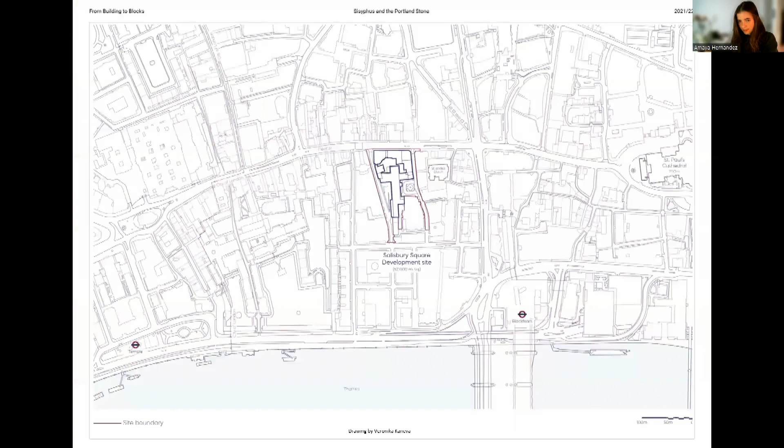Hello, my name is Amaya, and my project is called Sisyphus and the Portland Stone. I'm sorry that I could not be in the room with you today presenting, but I hope you enjoy the presentation. So the presentation is split up into 4 parts, and we begin with a prelude. The demolition site I chose to focus on for my thesis is the Salisbury Square demolition. Situated in Fleet Street, the demolition comprised 9 buildings total, and it will make way for the City of London's new Justice Quarters designed by Eric Parry Architects. As a unit exercise, we were asked to make a material audit with all materials that we believe to have reuse potential on site.

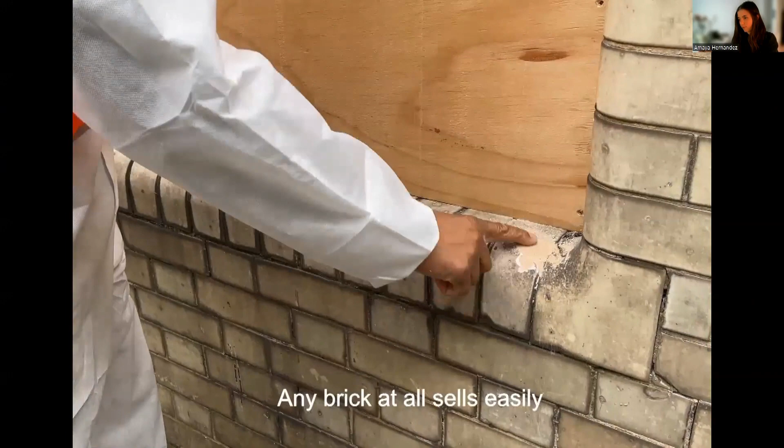Eager to know if these materials had any value in the reclamation market, I decided to give some reclamation dealers a call to find out. Do you guys still take London stock bricks? Yeah, are they the red ones? Or they're the yellow ones. Yellow? Yeah, we do. That's the only kind of thing we're looking to buy in at the moment, kind of brick. Certainly bricks are worth fortunes at the moment. Any brick at all sells, and all stone, slate, and stuff like that.

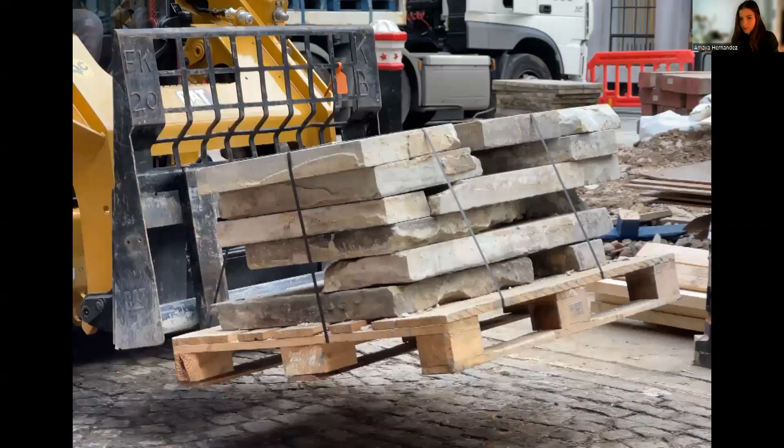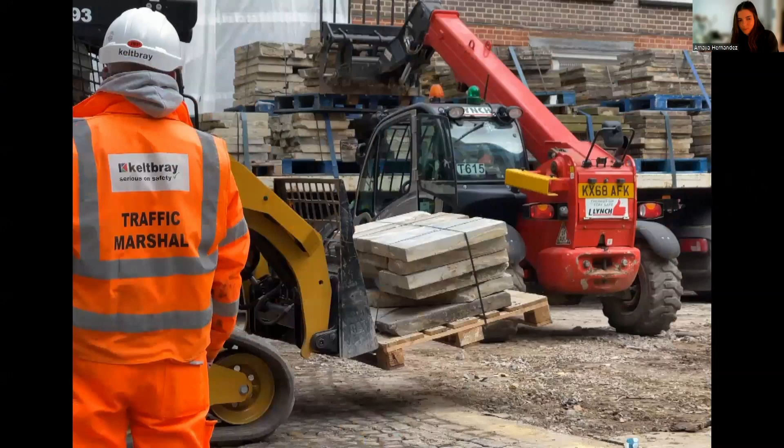So after contacting 8 dealers, I took the opportunity to send them the material audit that was previously made, and I helped the interested resellers schedule site visits with the demolition contractors directly. As a result, 500 square meters of Yorkstone paving were reclaimed from site, as well as some doors and cast iron railings.

It was a bit surprising to me that it took an overly enthusiastic architecture student to connect the reseller with the demolition contractors to ensure the reclamation of the Yorkstone paving. Surely this had to be somebody else's responsibility on site, no? But after looking at an endless list of consultants for demolition sites, I realized that there is no one actor who is responsible in overseeing the reclamation of materials.

Apparently not even the on-site sustainability manager, as one of the site managers told me I had done more in a week to reclaim materials than their sustainability manager had done in a month. Perhaps this is due to the incredibly vague job description, which mentions something about the implementation of sustainable strategies, which can really mean a lot of different things.

What I propose is an incredibly specific job description, a new consultant in the building industry that I am calling the material broker. A material broker facilitates negotiations between material resellers, demolition contractors, architects, and their clients to promote the reclamation of our existing building stock. Ensuring material salvage is the sole responsibility of this consultant, and of course, everything that comes with it.

The reason why this is such a crucial role is because many material reuse ambitions start out quite strong, but are left to the stamina of the other actors in the ecosystem. Inertia takes hold, the actors become increasingly busy, and the reuse ambitions begin to crumble until there are none left. This is why the material broker role as a mediator would be beneficial in making an active change in the building industry. When it comes to reuse, the actors in the ecosystem will revolve around the material broker, easing logistics, storage, and reclamation procedures, as well as salvaged material procurement for anyone involved.

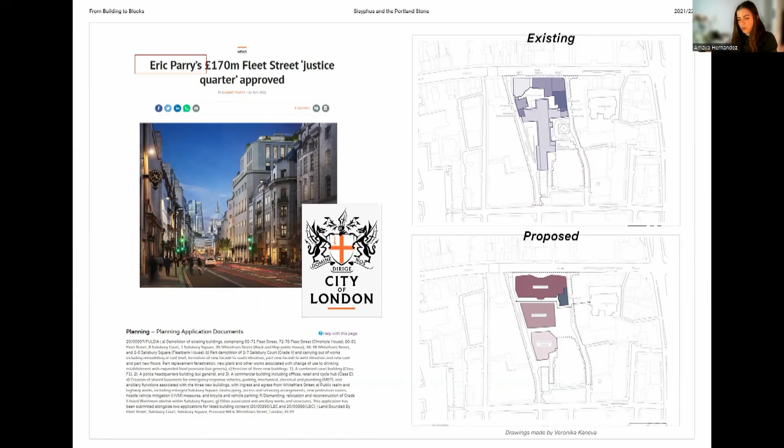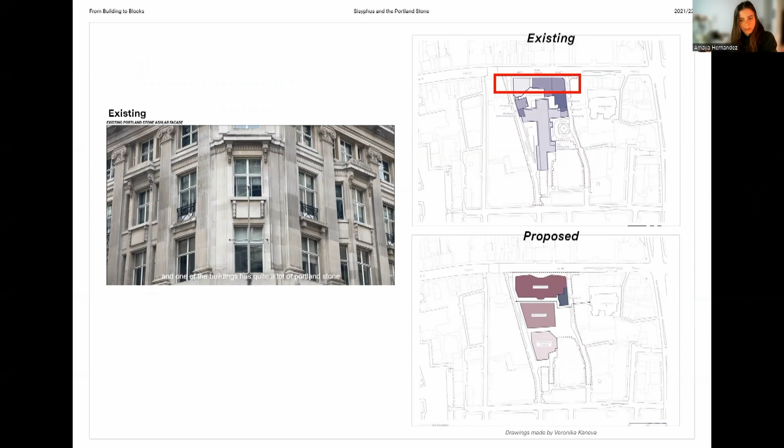When I was thinking of who could potentially reclaim the stones, I thought the most obvious contact was Eric Parry Architects themselves, as they, along with the City of London, have decided to demolish a Portland stone building and replace it with a Portland stone building. My first ambition was to convince them to reintegrate the existing Portland stone into their new scheme.

But I couldn't just send them photos like I had done with the previous resellers, because I knew that all that they would see was a whole lot of ornament, which clearly clashes with the Eric Parry cool aesthetic. Or does it? What better way to convince architects than through design? My theory was that if I designed the stone reintegration well enough into their new scheme and presented it to them, they would be so impressed and want to salvage the stones themselves.

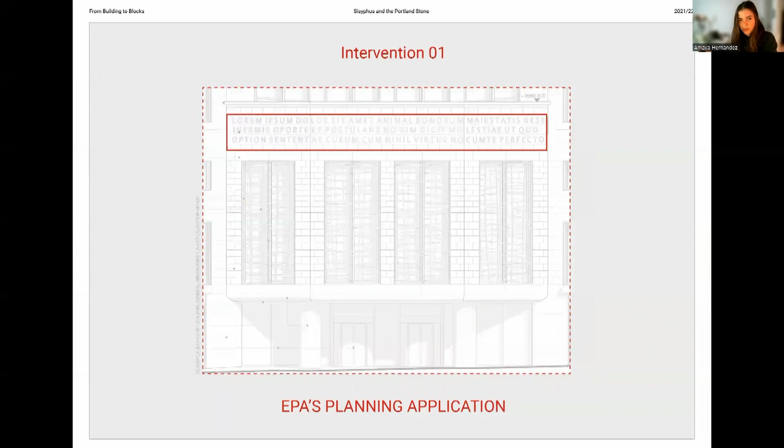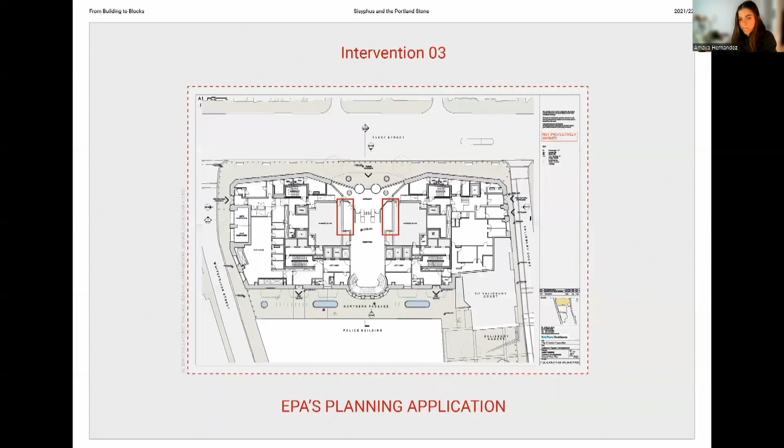After categorizing the stones from 80 and 81 Fleet Street, I chose 3 moments in the Eric Parry existing scheme that I saw fit for reclaimed stone. I added reclaimed ashlar to the inscription band. Art Deco pilasters to the bay windows in the back facade, which just so happened to be the same proportions of what they were going to propose anyway. And the wall for the main entrance made from reconfigured pilasters, assuming that they are devoid of entasis.

I then packaged the drawings and sent them to the architects as an actual proposal for them to consider. But after meeting with them, they informed me that the project was too far along to make any changes. I then realized that design should be an integral part of the material broker's toolkit. So I repeated the exercise for 3 further projects to try to convince architects to salvage the Fleet Street stones, every time attempting to infiltrate not only their style of architecture, but their planning application documents as well, so as to help them envision the stones in their own project with ease.

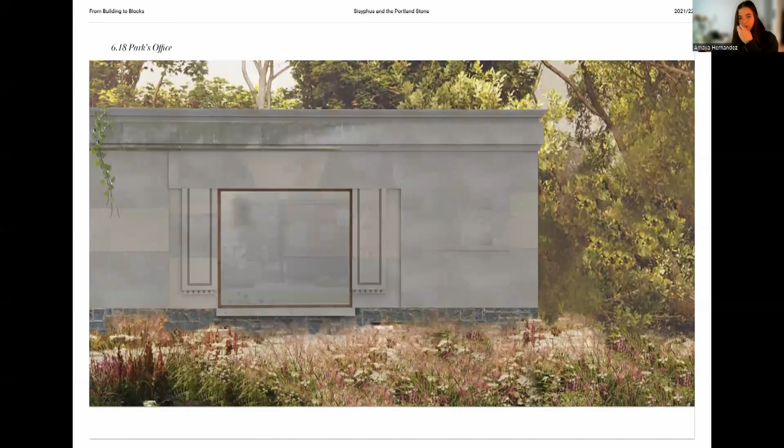Now, I sadly don't have time to talk about all of the designs, but my hope is that through reuse, we can also bring back a dwindling craft of building with stone ashlar, as well as re-exploring the possibilities of working with Cyclopean lime cement construction. No cladding here. As a material broker, I also wish to help promote and bring attention and clients to the existing resellers in the country by also providing them with design assistance and contacts.

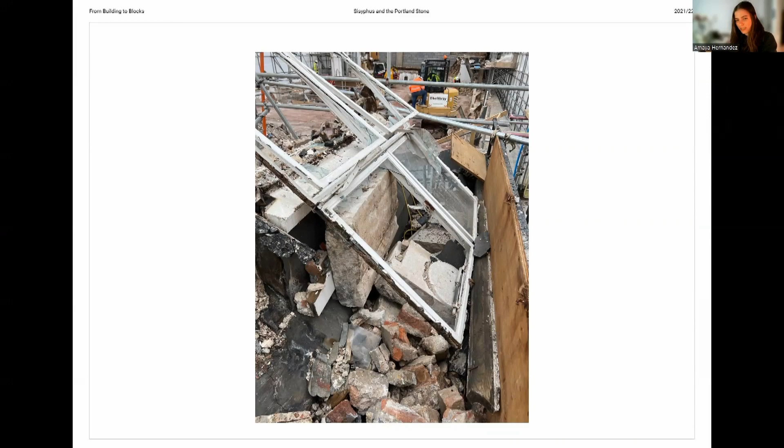So where do we go from here? In terms of the reclamation of the stone, as of now, meaning when I had first presented this project, this had been the only stone reclaimed by me. And as nice as it looked on the plinth from the honors presentation, my ambition is still to offer it to Studio Weave and reintegrate it back into the city.

In the last version of this presentation, it involved me saying that in case Studio Weave didn't manage to reclaim stones from site, there was still hope that the eccentric artist from Portland would reclaim the entrance to 80-81 Fleet Street and bring it back to Portland, as they showed a lot of interest in my interviews with them. And this is exactly what ended up happening. In a short email from Robert Greer, a contact at Pay Stoneworks, he informed me that the Portland Stone and Quarry Trust will officially reclaim the entrance stones to 80 and 81 Fleet Street.

And this is what their drawings actually look like. Unfortunately, I don't have any images or videos yet of the dismantling as it took place at the beginning of this month. But I can keep you guys posted, whoever is interested in seeing that.

And in terms of where the material broker is going, I have secured a job with the reclamation dealer Retrouvius, and have been asked by them to further develop the role of the material broker for the benefit of their company. And I've also been on the lookout for architecture firms I can infiltrate with a genuine interest in applying this research. And at least that is still the plan for when my holiday ends. And I'd like to leave you with this. Where demand does not yet exist, it can be sparked. And where supply is lacking, it can be encouraged.

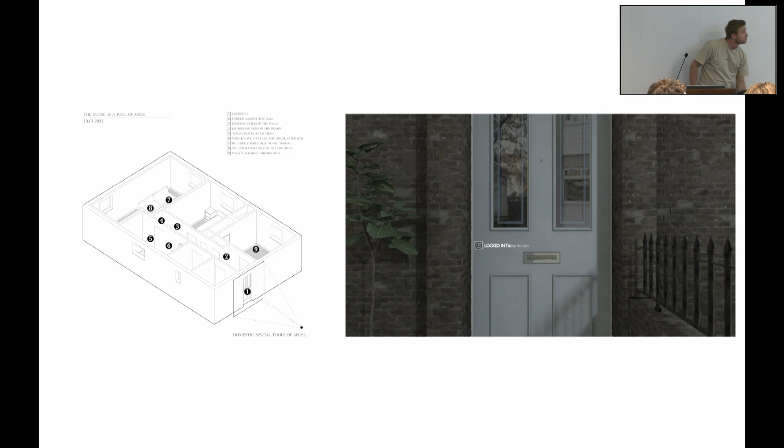There were times when my partner would lock me in the house and take the keys with him. I couldn't get to work and consequently lost my job. My partner would often force me up against the walls. I'm not able to be specific about where because it happened so often. He would punch holes through the walls and the doors and tell me to repair them because they were my fault. The doors became a weapon in the home. He would use them to jam my arms so tightly it felt like they were broken.

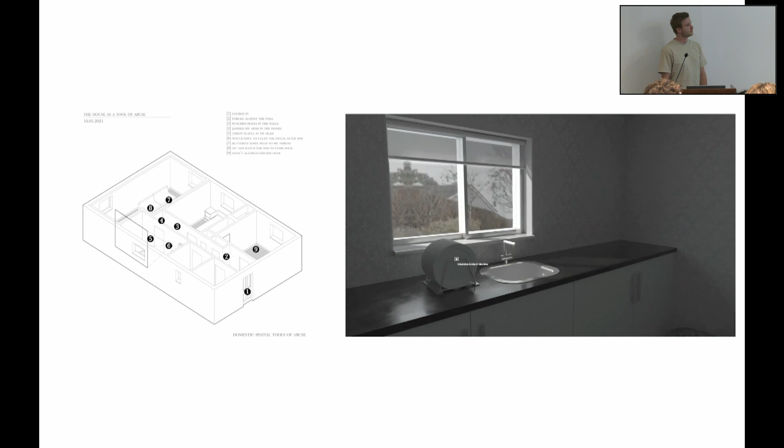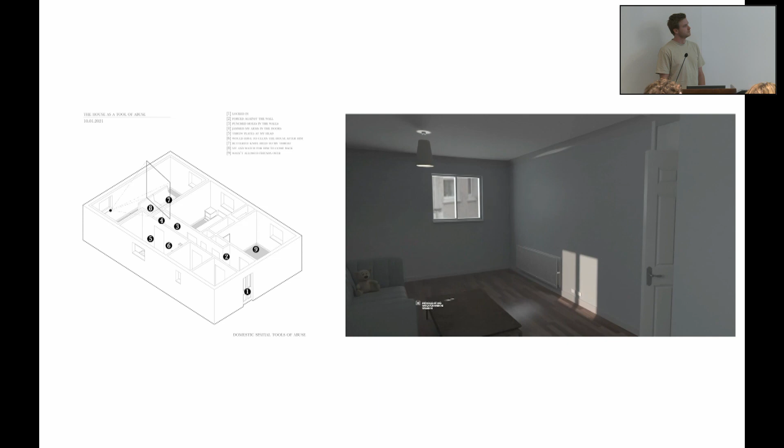He would throw plates at my head along with other objects, making a mess, and then would expect me to tidy it up. He would never help with the house. When he got angry, he would take out one of his knives to play with it, knowing this would scare me. One time he held a butterfly knife to my neck. I would sit on the edge of the sofa so that I could see when he returned. I wouldn't move when he hurt me. I didn't want him to feel like he had won.

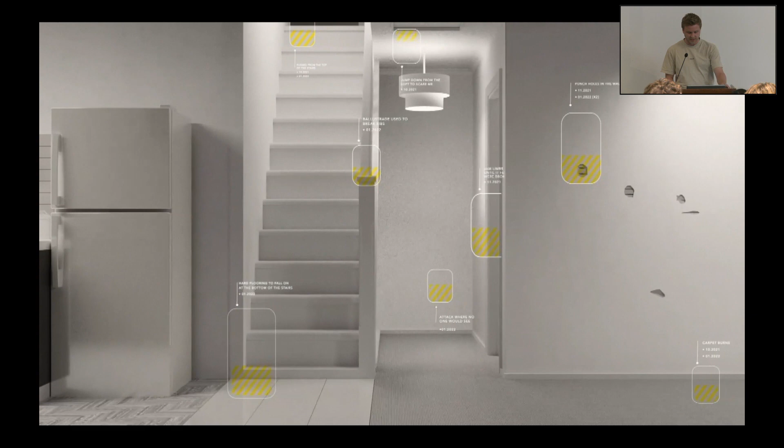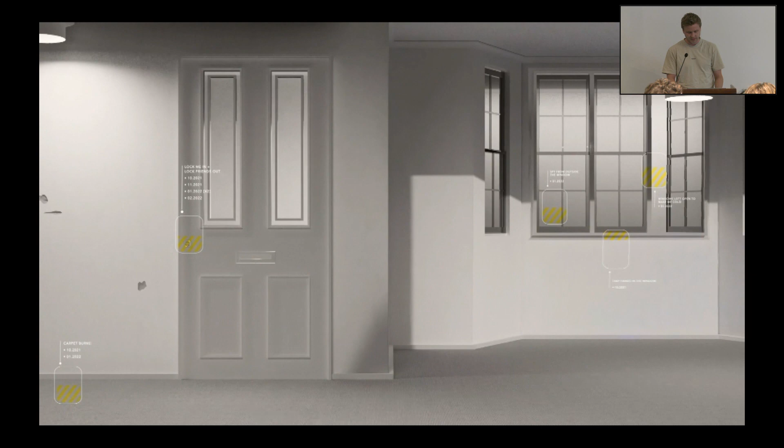Interviews with survivors speak of a series of architectural fragments used in abuse. Made evident through 3D reconstructions, these conversations have been translated into a spatial reading in order to clearly correlate the common trends of how the home has been used as a weapon. Although not the cause of abuse, the inseparable link between the home and abuse trauma has become a pertinent subject for the architect. The balustrade used to break ribs, heat sources used to burn hands, and kitchen counters used to cut open the back of survivors are just a few accounts told in conversation.

Additionally, interviews highlighted the importance that neighbourhood has on escape. Evident through one interviewee being continually beaten, she climbed out of her apartment onto the scaffolding to a neighbour's flat. She returned home where the abuser had been hiding in the loft. She fled again to the neighbour, who contacted the police and made an arrest.

Historically, refuge shelters provide short-term support. However, a shortage in permanent housing has meant the overcrowded shelter is refusing entry. In 2021, the UK government responded with the Domestic Abuse Act, giving priority to the survivor into social housing. Nevertheless, with no spatial criteria, the Act excludes the architect from the conversation through its terminology and definitions. Consequently, social housing as a long-term solution for many is ill-favoured or even worse than staying with the abuser.

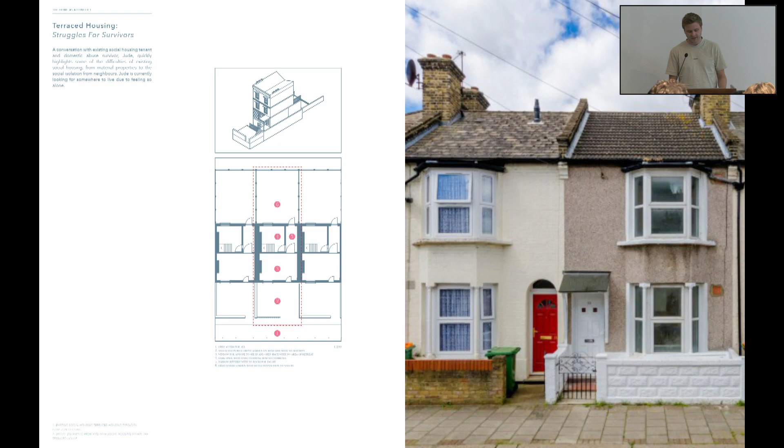Social housing typologies reveal the inappropriate spatial conditions for post-abuse, with the terrace triggering through public windows, the low-rise by sterile stairways and hard surfaces, and the high-rise through thick concrete walls and disjointed public views. Social housing as a response is currently delaying recovery.

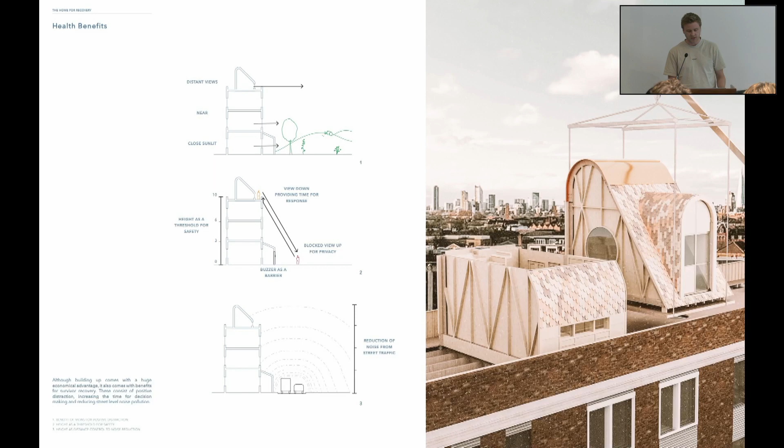In line with the Domestic Abuse Act, this project proposes a retrofit to existing housing according to a scale of funding. The materials and building methods reduce costs and construction time, allowing for the proposal to become an economically viable option. The proposal is designed to allow local authorities to work up to 4 different capacities. From fabrication through to fragments of urban recovery, the proposal creates social overlaps within existing neighbourhoods.

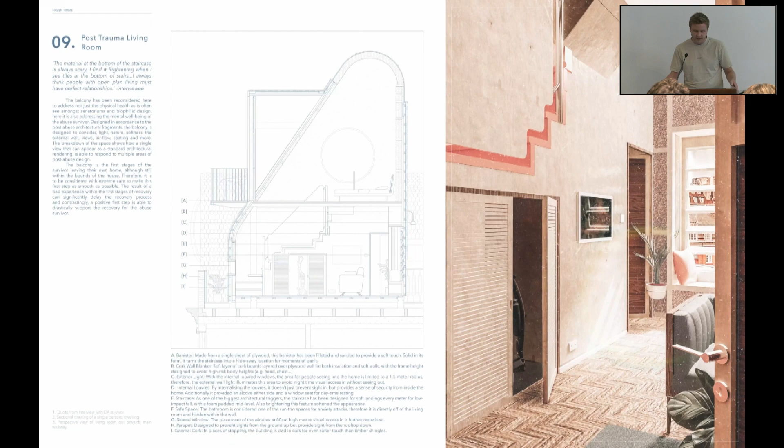The domestic space supports gradual recovery in the existing building through retrofits such as the balcony as the first moments of leaving the home. The design of non-typical windows and split-level staircases support a feeling of safety for those with PTSD. And further, the shared kitchen learns from existing shelters, enabling conversation with the adjoining neighbour having experienced similar events of abuse.

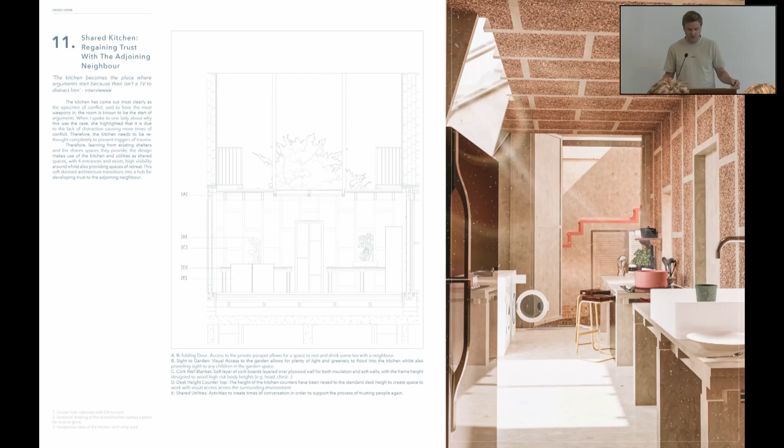The project is set out to support the recovery of those affected by abuse. However, in turn, the design re-engages with the existing community of social housing. Using height as a threshold for safety, on-site shared facilities such as allotments, swimming centres and the creche provide alternative routines within the existing estate to support the process of recovery through engagement, retrofitting the existing building and rooftop to better enable social crossovers.

Each estate works with already established stakeholders alongside local authorities, as I've already contacted, and the project responds at both small and large scales. Prior to construction, the design process offers a one-to-one built fragment as a tool for further conversation. The one-to-one re-engages with the survivor to discuss a life post-abuse. The interviews are not researching the survivor, but researching with the survivor, using their voice as an integral part to the design process.

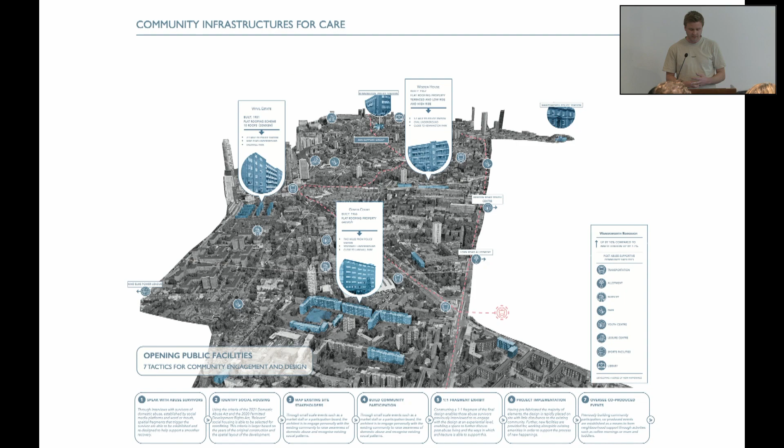Responding to a national problem by building on 3 main typologies in keeping with the permitted development rights, making use of community infrastructures, mapping relevant housing according to supportive networks.

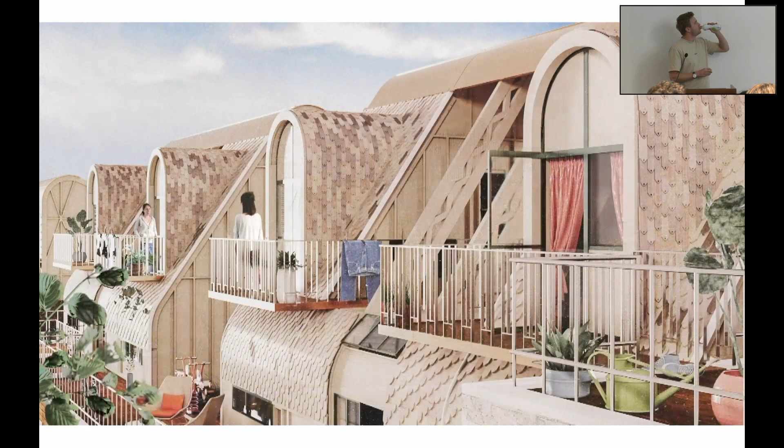I like to come out here in the mornings, see what's going on outside. Who's already up and out, and then head back in and start the day. There's a real parallel between light and progress. I feel like I'm finally starting to get back to a sense of normality, at least a new kind of normal.

I feel best when my mind is busy and doing something. When I'm alone at home, things always seem much harder. So I come out here, mainly to occupy my mind, to help forget, and to also start something new, spending time with my neighbours.

We go to the creche twice a week. It's an hour or two where she's happy playing with her friends, and I can just unwind with a cup of tea along with any other parents that want to stay.

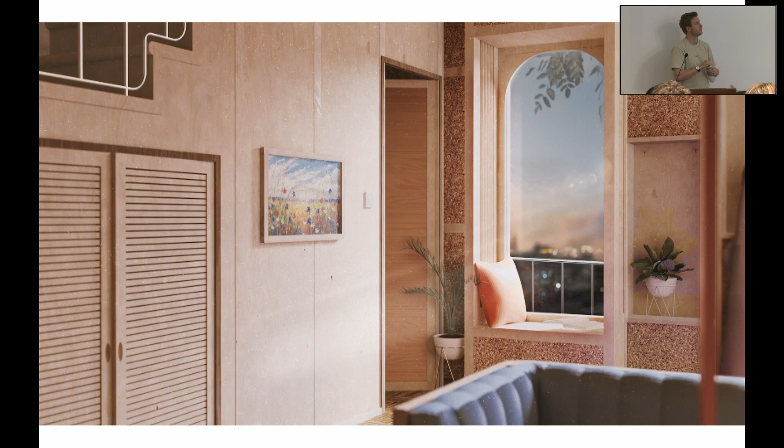The evenings are nicest for me. When the kids have gone to bed, I'll come and just sit here for a bit and lose track of time watching the city lights. It makes me feel hopeful, and I like that. I like feeling like that.

It's architecture that provides the stage set for domestic abuse and provides the tools of violence for abuse. Architecture gives the abuser the privacy and power to perpetrate their violence, and it is architecture that casts the characters of abuser, abused, and the peripheral reticent neighbour.

Therefore, it's imperative to question the role of architecture within domestic abuse, and consequently the role it must play to become an architectural antonym, transitioning the house for the survivor from a place of violence to a home of refuge. So just to finish up with a few thoughts, finishing the studies, and a few kind of behind the scenes of how I produced the work.

The process that I used began through talking with people. It was through conversations with social housing tenants, and then particularly a conversation with the mother of a girl in the youth group that I led, that then led me to the study into the lives of survivors of domestic abuse and the role that architecture can play. The aim of my work is always to use the skills of the architect to help the lives of those around me, and I do this by working as collaboratively with the community as possible.

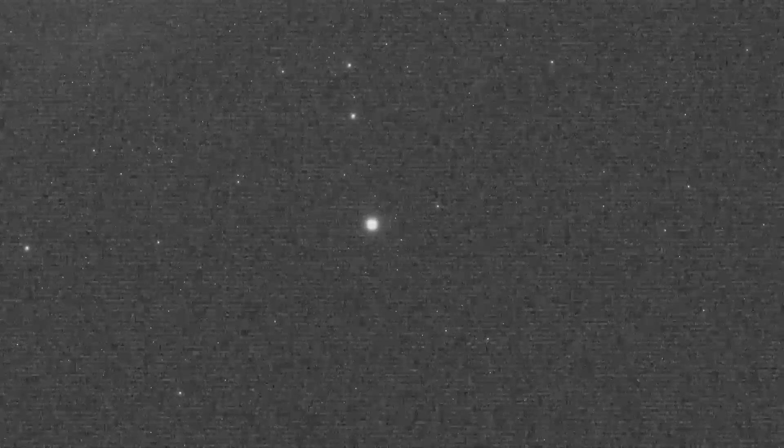The universe is 13.8 billion years old, unmeasurably big and expanding. Life first emerged on Earth 4.28 billion years ago. Humans have only been in existence for the last 300,000 years. We are yet to discover life anywhere else.

Human action, rooted in an instinctual drive for dominance and control, is becoming deadly. As is well known, this is causing unprecedented biodiversity losses, severely threatening the existence of all life on Earth. Learning to change our behavior is a difficult challenge, but now our survival vitally depends on it.

In 1990, the French philosopher Michel Serres put forward his notion of a natural contract of symbiosis, in which our relationship to things would set aside mastery and possession in favor of admiring attention, reciprocity, contemplation, and respect.

Post-human theories such as this share a common understanding that the key to our survival is to surrender our dominant drive for control, to decenter ourselves and recognize our dependence on the contingent and interdependent planetary ecosystem of which we are a part. The incredibly vast scale and intricate nature of this system infer that even the smallest actions can cause large and unpredictable consequences for any number of biotic and abiotic entities. Hierarchies dissolve as all things exist on a flat ontology.

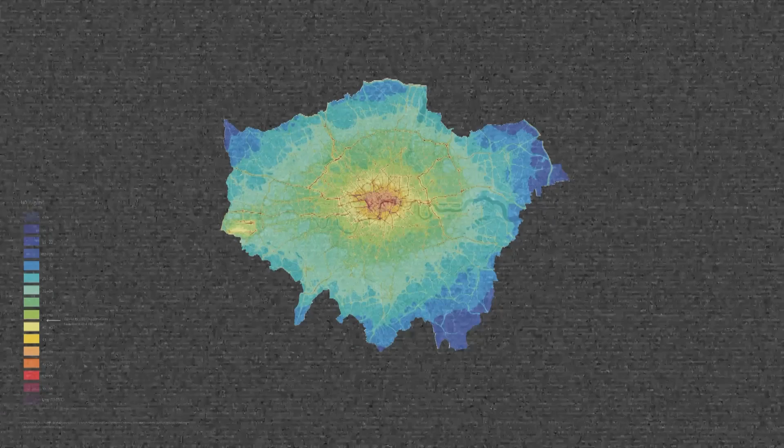The City of London serves as a microcosm of the global ecological and existential crisis, with the lowest biodiversity levels in the UK. This lack of biodiversity, compounded by the relentless spread of the city's infrastructure and rising human population, is increasing flood risk, heat island microclimates, and pollution levels, all of which are at critically dangerous levels for human health.

2,997 brownfield sites, covering 26.42 square kilometers of land, form some of the last havens for non-human biodiversity. Although these sites may appear vacant to the casual human eye, these sites are teeming with life. The large expanses of bare, heat-retaining concrete provide crucial habitats for at least 15% of the UK's nationally scarce invertebrates, including the streaked bombardier beetle, the distinguished jumping spider, and the brown-banded carder-bee.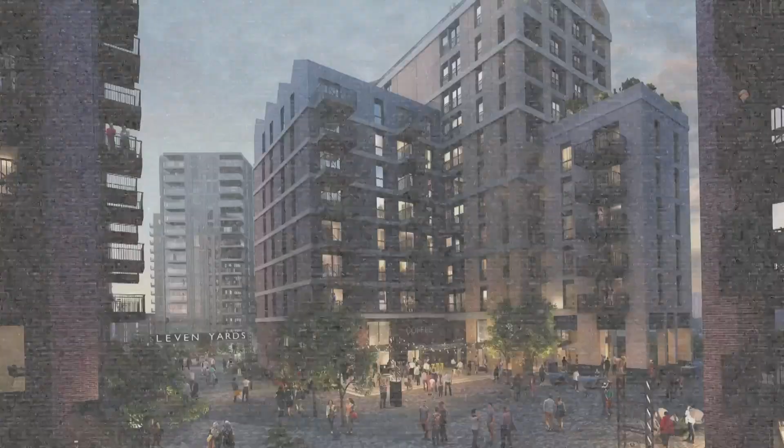Since the ecological importance of these sites is not widely understood, they are constantly under threat from fly tipping and heavy housing developments for a city already 18 times more crowded than any other in the UK. Recognizing the urgent value high biodiversity levels hold, this project seeks to safeguard these brownfield sites as ecological reserves by the erection of anti-human wall systems.

Comprising three typologies, the wall structures are positioned according to wind load and monitored traffic levels. A perforated wall for animal and plant access, a more protective wall to guard against heavy traffic levels and wind loads, and a building typology for human intervention.

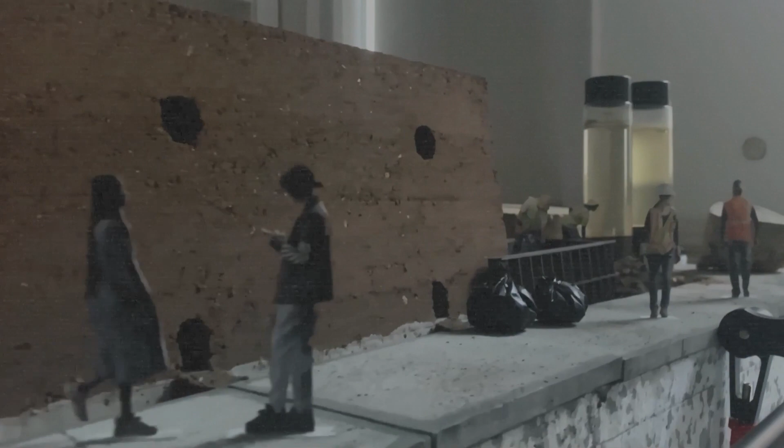The walls would be constructed over a year from an unstabilized rammed earth composite, sourced from within the brownfield sites themselves, reducing transport and manufacturing pollutants and the associated costs. Designed apertures in the wall would allow the free passage of plant and animal life to enter the sites at will.

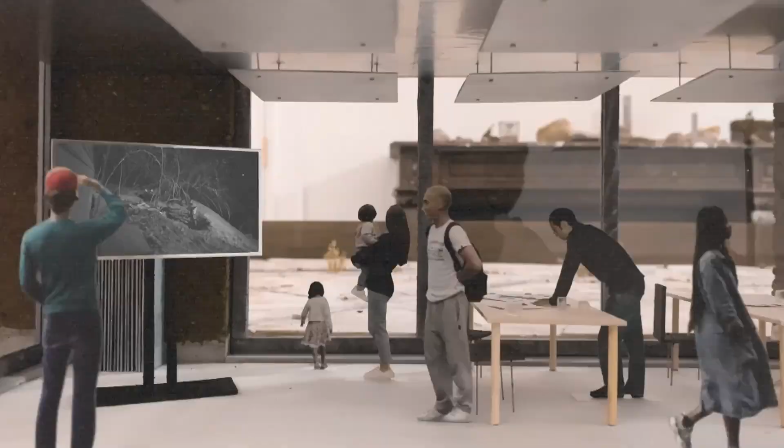Embedded within the wall structure would be an adaptable building for human use, one part used by ecologists to analyze and learn from the emergent urban wildlife developing within the sites, and the other to provide a space for the general public to observe and learn from the ecologists about the importance brownfield sites hold for biodiversity levels.

Plants provide the foundation on which all other living things depend. By reducing human access, the wall system is really allowing space for plants transported by wind, birds and mammals to spontaneously grow through the process of ecological succession. Biodiverse habitats comprising a wide range of living things will emerge and transform as biodiversity increases over a period of roughly 200 years.

We're talking about 200 years, but we're actually not sure because no one's ever really monitored anything that's been left to degrade. So it is what urban ecologists need, because what we don't have is that baseline data on how long succession takes.

Let's just see. Due to the inherent unpredictability of this project, the buildings themselves are designed to be adaptable, employing modular building techniques to allow for change and evolution. Let's be the pioneers. Let's be the new explorers. Just watch on our doorstep.

Within the reserves, as the ecologists carry out their essential work, guided walks along demarcated paths offer the public the opportunity to experience the variety of emergent life firsthand.

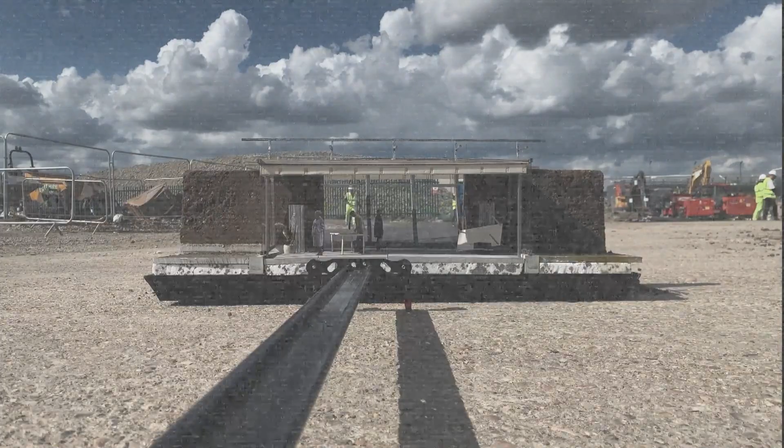As these biodiverse reservoirs develop across London, they form part of a green network, prizing open the space urgently needed for non-human inhabitation. If everything has equal value in a flattened ontology, it becomes impossible to avoid negative impact. To this end, the project itself is less concerned with finding architectural resolve, believing this to be impossible, and rather proposes the development of a practice positioning the architect as a mediator between the human and non-human worlds.

This calls for the architect to embrace uncertainty in partnership with the processes of ecological succession, to think in extended periods of time regarding the succession of the material and social structures we put in place. The architect's agency will always cede to the processes of ecological succession. Isn't it time we embrace that?

Hi guys. I'm sure you guys are just starting off and a bit stressed about your years ahead in the school, but I'll tell you one thing, it's probably going to be the most exciting times of your life, so just enjoy it. I'm going to start off by showing you my project, which has been a culmination of a study of domesticity over a few years at the school, and culminated with a project about public housing in Karachi. The project is titled A Void, Reintroducing the Patio to Karachi, in which I observed the city through the dwelling type and its ability to provide respite in a dense urban fabric.

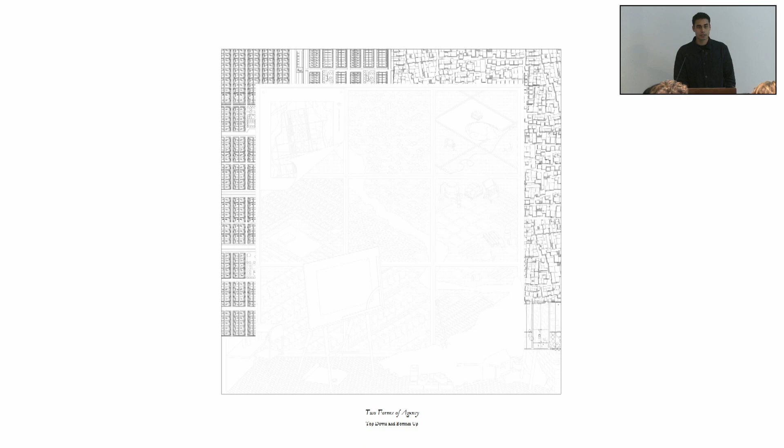The project uses the patio as a void space for mediation during both the building and inhabitation of a public housing scheme in Karachi. In order to interpret this void, I would like to discuss how housing has homogenized itself into a debate of autonomy and governance in the built environment. This discourse is divided into two major philosophies: the first, a top-down approach advocating centrality, and the second, a bottom-up promoting forms of self-governance.

While critical of both extremes, my project questions whether the excess or the lack of choice results in a burden rather than a liberty, and situates itself in between these two philosophies, where choice is limited to taking decisions that matter. It interrogates the unresolved relationship between a state-led initiative and a self-governing system, where the role of the architect is the designer of a framework rather than specifics. The project is located in Karachi, a city of 22 million residents, of which 50% live in squatter settlements known as Katchi Abadis.

It is home to the largest labor opportunities in Pakistan and consequently has a housing demand of 100,000 units with a backlog of approximately 6 million units that are considered inadequate. This demand is predominantly being met through the densification of dilapidated squatter settlements in the city center or the expansion of new ones on the periphery of the city.

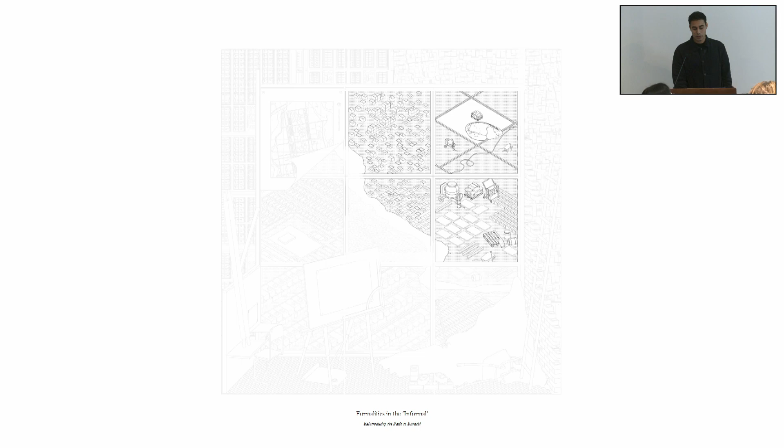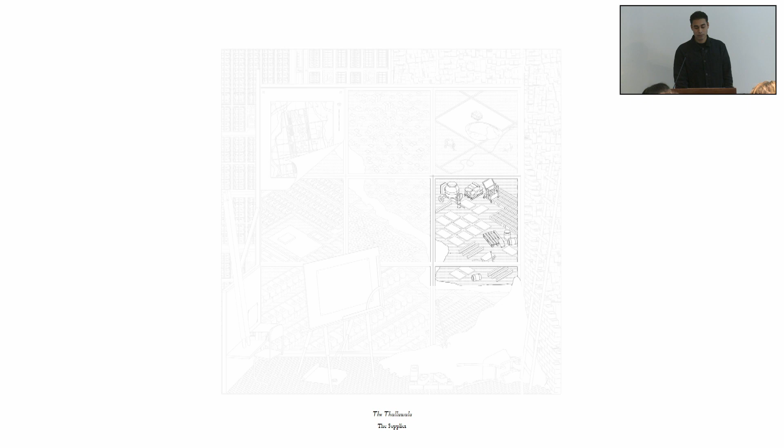Through the undressing of the Katchi Abadi, my research would like to make evident the formality behind what is often considered informal, suggesting that even in a bottom-up approach, there is no sense of complete autonomy. The success of the Katchi Abadi can be narrowed down to two actors, the middleman, known as the dalal, and the material supplier, referred to as the thallawala. They have designed a method enabling housing to be scalable, replicable, and affordable.

Dalals can be interpreted as the urban planners behind this form of housing. They first grab state land through political affiliation and bribes, subdivide it into 60 plots per acre, in which subdivisions are as dense as possible to accumulate maximum revenue. They do this through a method of demarcation using the cement block, enclosing plots that are to be built within, resulting in a master plan.

The scale and speed of construction is aided by the prefabrication process run by the thallawalas, who are considered to be the architects of the dwelling typology. They manage the prefabrication yards that provide material, knowledge, and labor for housing. Operating on an empty plot of land, they produce precast concrete elements and are frequent across all neighborhoods of the city. This process of prefabrication is essential to the replicability and scalability of these settlements. And through this formal framework, these actors have managed to house over 50% of the population.

This procedure, though highly efficient, lays out a sequence of problems. The first is the unregulated privatization and commodification of state land. The second is the inability of the current dwelling type to adapt to different forms of living. And lastly is the settlement's morphology, which does not provide public spaces for social interaction, forcing inhabitants to use alleyways or remain indoors.

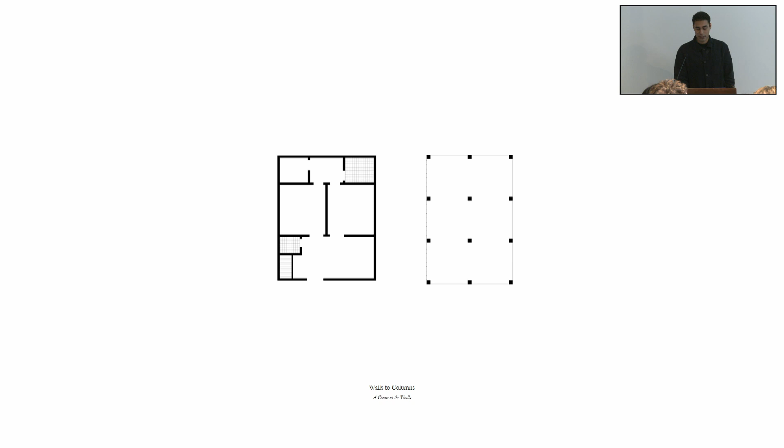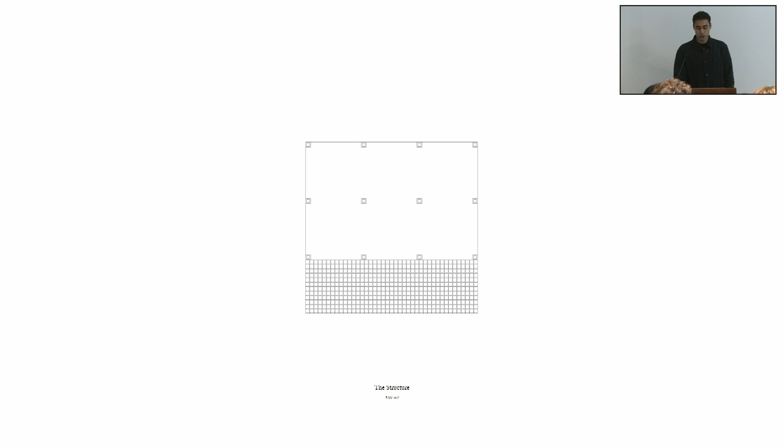The second initiative by the state is to transform the existing typology by empowering the thalwala. The current prefabrication type of load-bearing walls is reformed to a system of precast columns, making it durable to densification and accommodating for a multiplicity of dwelling needs. The typology is designed on a 100-square-meter plot, in which a third of the plot remains void as an outdoor patio. The other 2/3 is a grid structure composed of 12 columns.

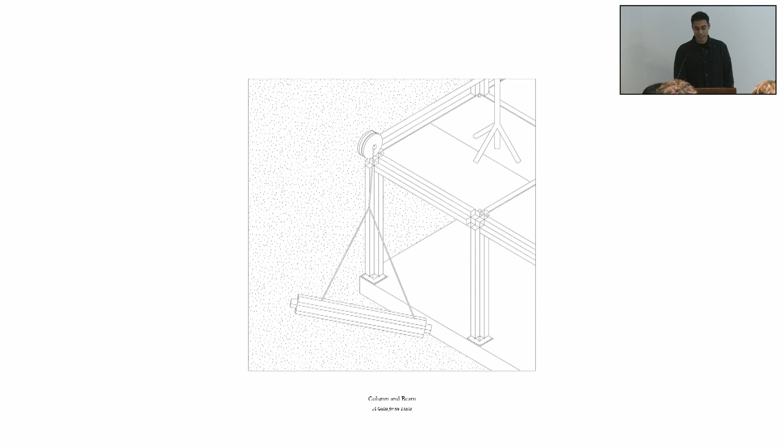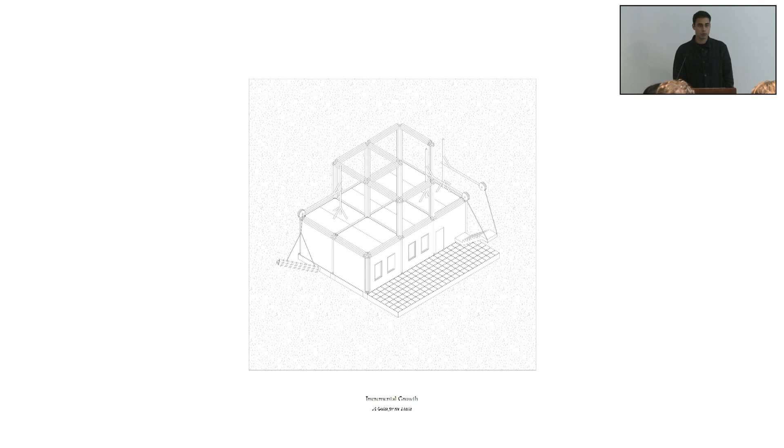The state provides a manual to the prefabrication yard, describing a step-by-step process on how to cast and erect elements in this structure, which is designed to be straightforward, minimizing training required for the local laborer. It is composed of columns, beams, and slabs, and in order to decrease the variety of prefabricated elements, the column and beam are intended to be the same piece, with equal dimensions. Columns can be added on existing floors, allowing the structure to grow incrementally, where families or individuals can extend bays and add floors when needed. All elements are sized to be maneuvered through local transport, mitigating expensive costs.

However, the rigidity of the structure is mirrored by the flexibility of the interior, which proposes a new form of domestic space. The existing compartmentalization of specific rooms is challenged by equalizing the size of the rooms, taking away the sense of predefined hierarchy. The typology is split into 3 strips: an enclosed interior, a semi-outdoor veranda, and an outdoor patio on the ground floor. The wet core is always located in the same bay. The single pixel has hollow partitions and can provide up to 2 bathrooms and a single kitchen. The veranda is designed to be a void within the interior, a space that can expand or retract based on how people choose to live, a space left to be determined.

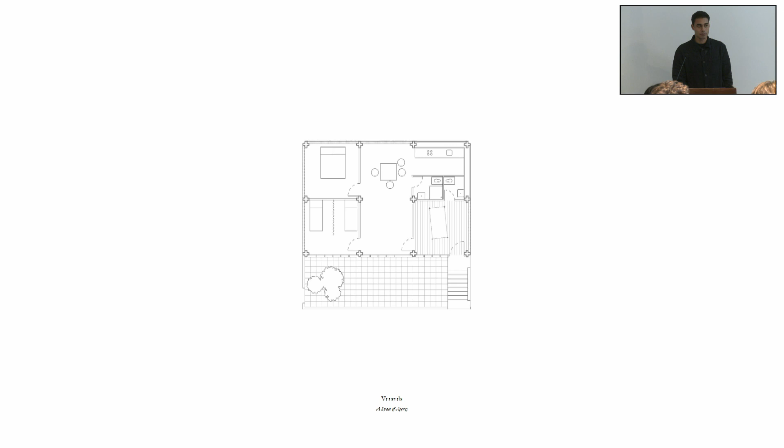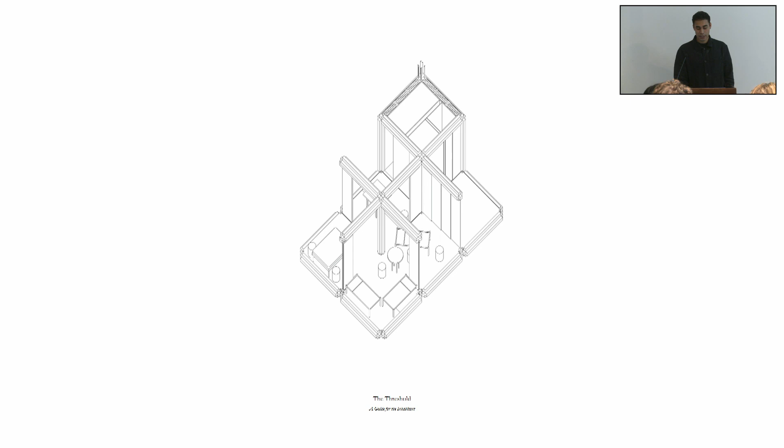This definition is made possible through a user's manual on the threshold. All interior partitions operate with a metal frame, permitting the inhabitant to decide on the type of boundary they require. This frame slots into the concrete structure along the grid of the unit, where the use of openable partitions delineates the threshold into a collective space, while fixed partitions use the grid to create privacy. At the scale of the plot, 4 units share a common utility shaft, along with the common staircases, turning circulation space into a moment of encounter and interaction.

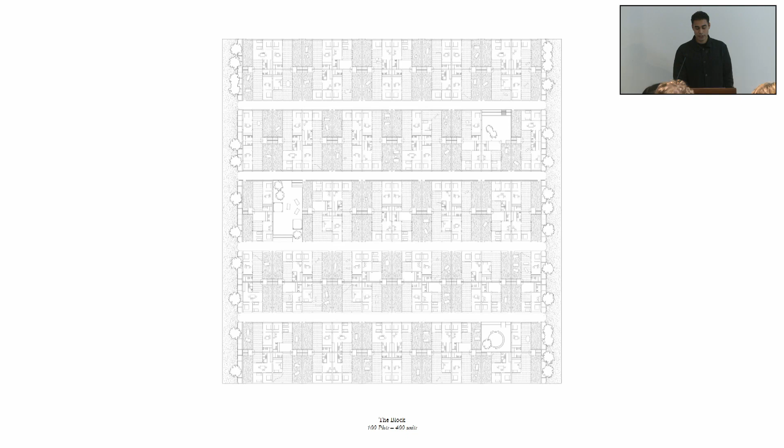These collective elements allow for units to expand horizontally, allowing for a variation of domestic lifestyles no longer restricted by structural partitions. This typology is repeated at the scale of the block, in which there are 100 plots that can accommodate 4 units each. The concentration is the same as that of the existing city fabric. However, the addition of the patio offers a relief within this density.

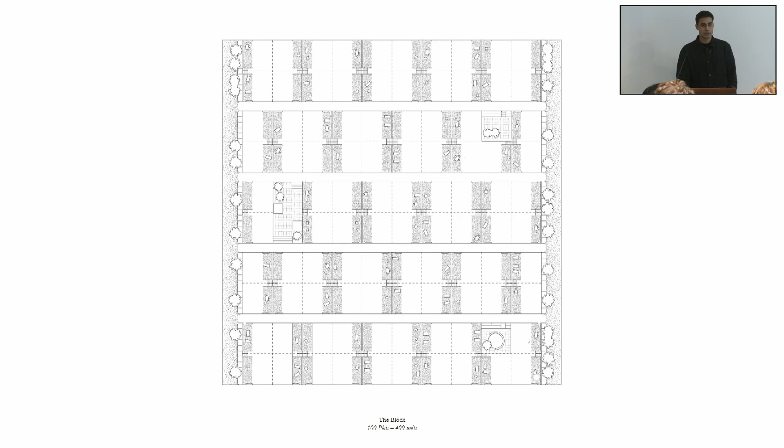At this point, I'd like to address the relevance of the patio, and specifically why it has been important to me and the culture of Pakistan. It is a space that has been historically relevant in the region since the time of the Indus Valley civilization, where they used a series of different levels for public gathering. It is still common today across the rural setting of the country, where a diversity of domestic programs are located in outdoor spaces, offering a semi-private realm for social exchange, specifically for women and children.

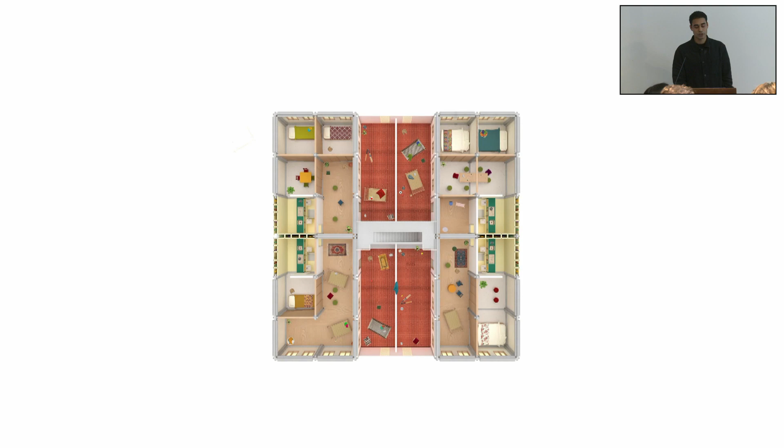Unfortunately, due to the densification in the city center, this space has been erased in Karachi. And through the restoration of this void, my proposed typology provides a sanctuary to those lost domestic rituals, where activities spill outdoors into the semi-private space, one that allows for a divided agency. As units grow vertically, the patio expands upwards onto neighboring rooftops, creating the urban as an extension of the domestic realm. The lifestyle is no longer limited by threshold, but is instead a negotiation between the interior and exterior, the private and public, and domestic and city.

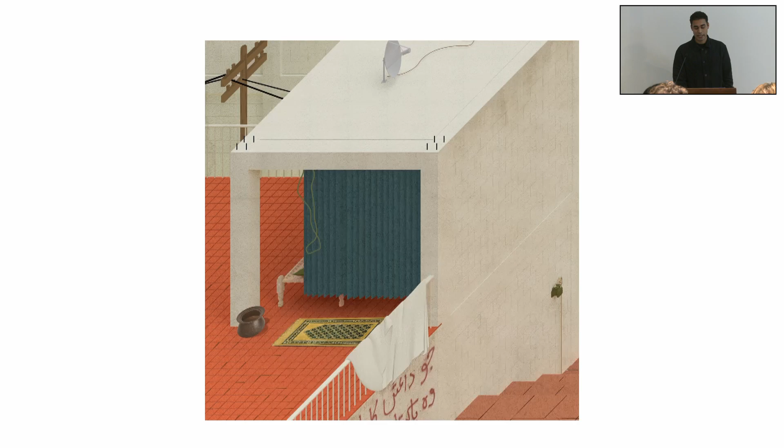On the ground floor, it is a niche for women and children to find refuge within their home. On the first floor, it becomes a sacred space for an evening prayer. This brings me to the third act by the state, which is the marking of their territory before it is encroached. Unlike the dalal, who forms enclosures allocating space of where to build, the state will mark their land through the space of the void, a space of where not to build.

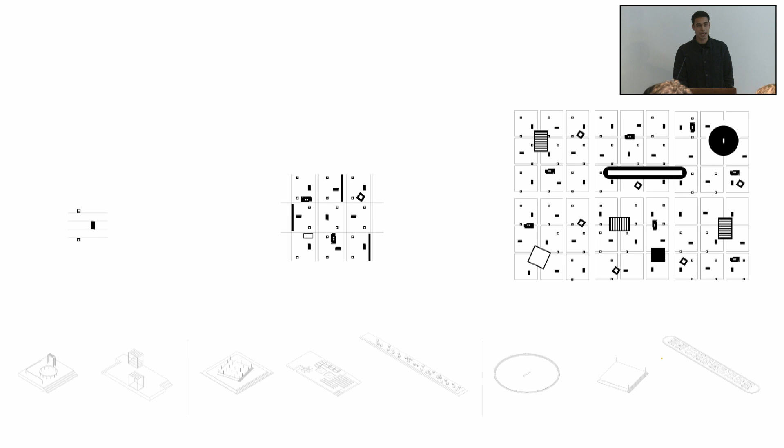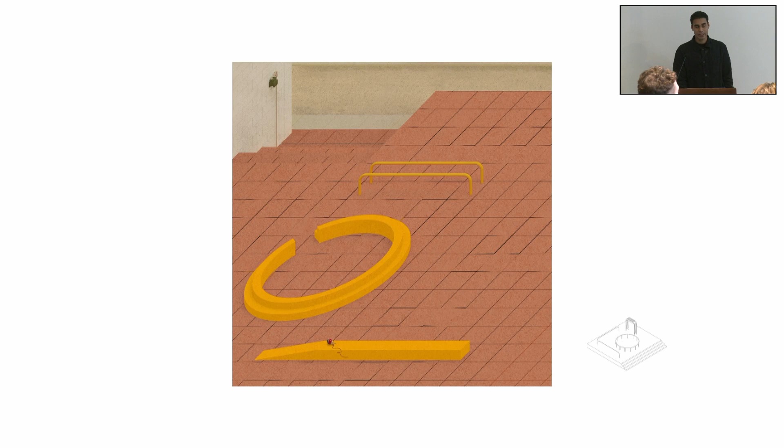The void is a series of urban patios that exist at 3 scales, depending on the size of state land available within the city. At the level of the block, a single platform is allocated for tea stalls to emerge, cultivating a local gathering, and 2 platforms are allocated for playgrounds. The neighborhood scale accommodates up to 900 plots, where a space for a local mosque can be used for congregational prayers. Linear voids form markets for ad hoc cart vendors, and 2 platforms are dedicated to the thalla for the prefabrication of the homes. These urban platforms disrupt the rigidity of the neighborhood, delivering a respite for inhabitants.

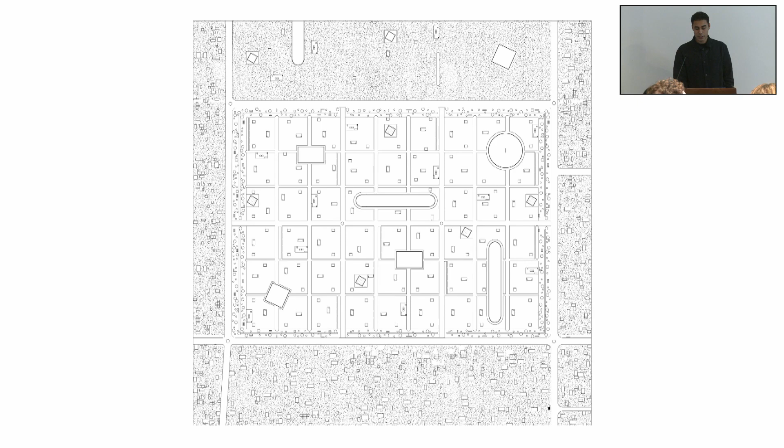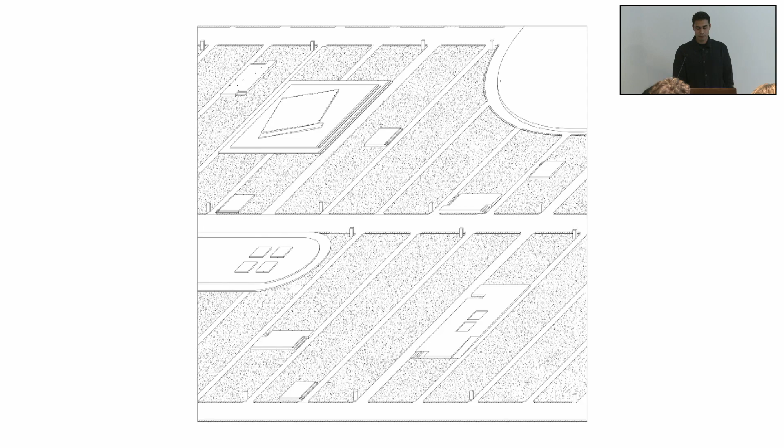The scale of the settlement is at which the pilot project takes place. It is on a parcel of land on the periphery of the city that is surrounded by growing squatter settlements. Here, the urban patio is used as a method of distinction to differentiate state land. The settlement's largest platforms include a grand bazaar, a Jama masjid, and a cricket field. The edge is planted with trees to limit endless growth and distinguishes an area for communal activities. Barren land is no longer left for middlemen to commercialize. As people move in, infrastructure is placed, platforms come to life, and homes are erected.

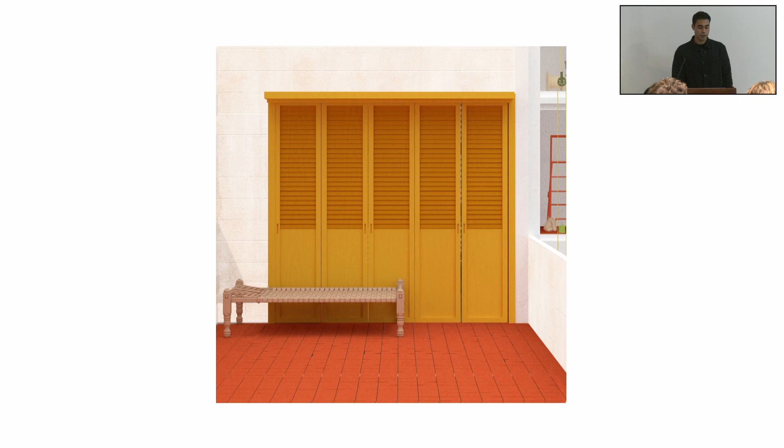As density increases, the urban patio remains void to use for public amenities, bringing children together for play as a pause within the settlement. Entering the home, a ground floor patio visually connects neighbors, where a child playing cricket is hidden from the construction next door. On the second floor, the rooftop is used as a patio, allowing the inhabitant a view of other such spaces in the neighborhood. Partitions open, merging the veranda and patio into a single space. The urban transforms into a varied yet uniform tapestry, where patios and rooftops blur into moments of refuge, creating inhabitable voids within a field of homes.

In conclusion, I'd like to emphasize the importance of the void, both at the scale of the type and the settlement, which makes evident its ability as a space to adjust and adapt, but not be completely redefined. A space that the architect includes in their design to provide a space of divided agency. Thank you.

So once again, I'd like to reiterate what Thomas and James said, that I think the best way to learn over here is to interact with the students and ask questions about what is going on within the school. And what you'll realize is that you learn more from the students around you than the tutors. Manija is smiling here because she's a tutor herself, but it's kind of a common truth. And I think just go along with the process and enjoy it.

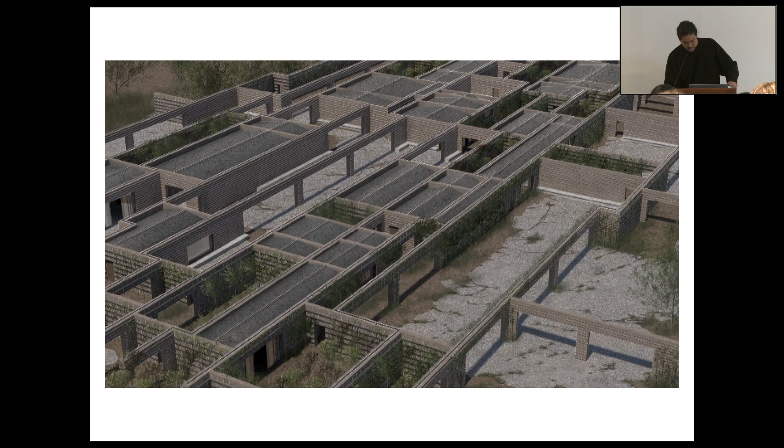Although the proposal still remains controversial, the collection of research presents the importance of improving the disparity across the country. It is not merely a political act, but can also be seen as an opportunity to reimagine our everyday life through alternative architectural approaches for living collectively in a rural condition. The project would explore this notion by introducing a new horticultural community in a former coalfield, where their social, economic, and communicative knot had been loosened by the closure of mining facilities in the early 2000s. By reimagining the clean, the intimate, the exposed, the hot and cold, the alternative way of collective living would bridge the gap between the sensorial atmosphere and the social action.

According to the UK Coal Authority, 1/4 of the population of our country lives in a coalfield, where a majority are under economic deprivation and population aging ever since the closure of the mining production. The project is situated in West Cumbria, a former coalfield in northwest England, adjacent to the coastal town, Whitehaven. With a history of mining production, the site is currently a brownfield with remains of concrete and tarmac slabs from the past. In 2007, the local authority announced a future plan to regenerate the mining production. However, with numbers of protests by the locals, the plan still remains paused. As a counter proposal to this planning, the project would explore the idea of horticulture as an intervention for boosting productivity and restoring a sense of community in a former mining site.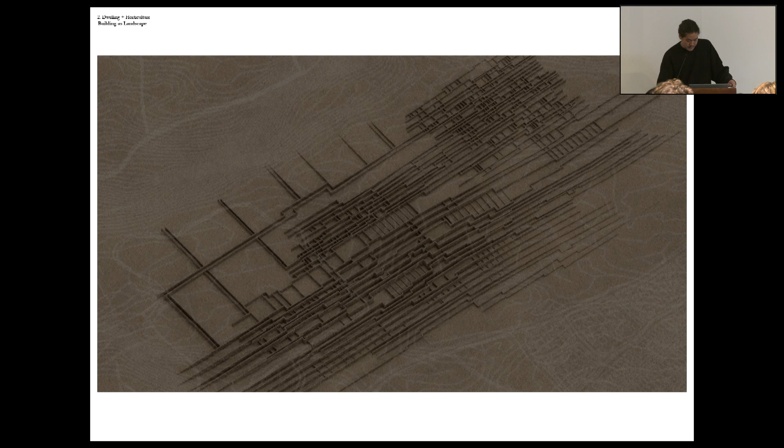The history of kitchen gardens first appeared in Britain in the Roman era. By the 17th century, the interest to harvest a more diverse range of fruits and vegetables led to the invention of various passive heating techniques, enabling products originated in the Mediterranean area to be grown in various climate conditions. With this method, numbers of regions across Europe successfully became recognized areas for horticultural production, despite their severe climate condition. These communities involved various trades other than horticulturists, such as carpenters and plumbers, in order to maintain their orchards within their own neighborhood. The project would reimagine this relationship between horticulture and collective living by introducing an alternative wall system, creating a landscape of dwelling and fruit production.

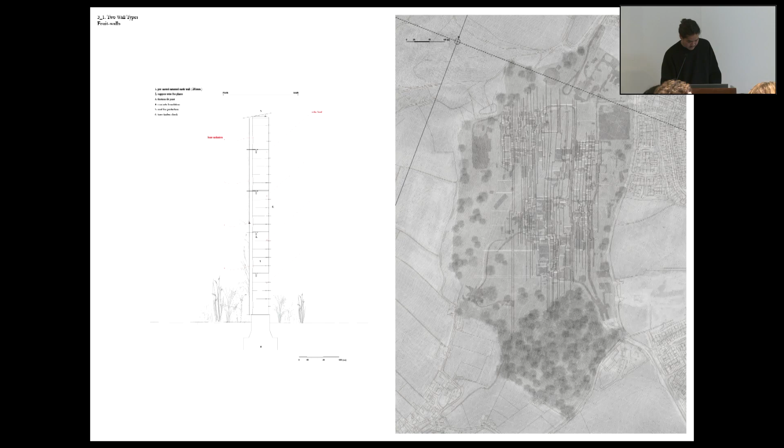The landscape consists of two wall typologies, an active heating wall running from north to south, and a passive heating wall running from west to east. The active heating wall uses the geothermal heat from the abandoned mining water existing underground of West Cumbria mining, located in the north edge of the site. The passive heating walls would apply the fruit wall method, capturing the radiation heat during the daytime and slowly releasing it to the other side in the nighttime. These two wall types are built in various distances in order to create a variety of microclimate conditions for different products grown across the site. By using the topsoil from the site, the rammed earth walls would contribute to the remediation of the contaminated ground condition.

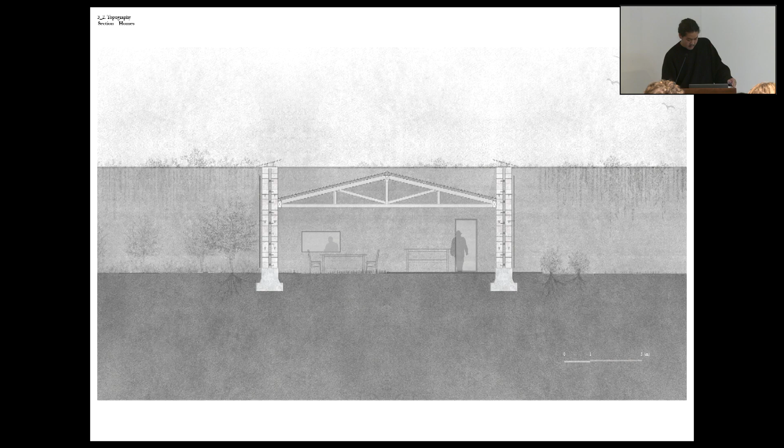In reaction to the spoon-shaped topography, the walls are constructed to be the same level, creating a new horizon across the site. By keeping the wall height consistent, depending on the location, the wall height would become a suitable place for congregation, or a height creating an inhabitable space. The roofs for the homes are sunken to not disturb the sunlight reaching the garden space, and in locations where the topography further deepens, communal programs are organized with an atmosphere with a higher ceiling.

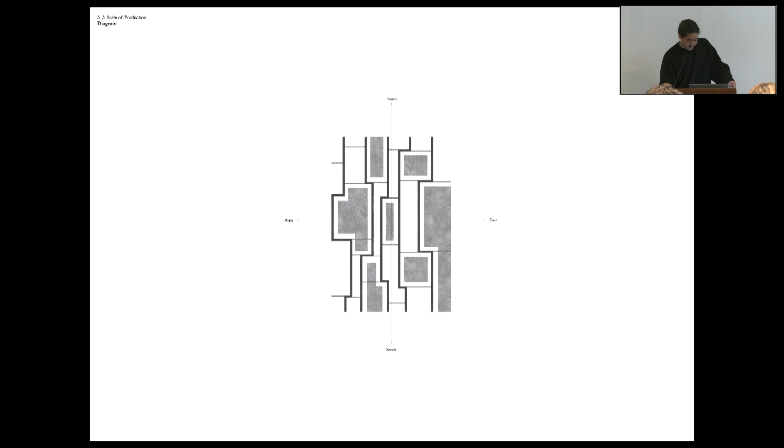The geothermal walls are fringed, avoiding the concrete remains, having the passive heating walls woven between, creating various conditions for both indoor and outdoor programs. 99 homes are divided into 3 clusters. The east cluster is most active during the warm seasons, producing summer fruits at their outdoor fields. The south cluster maintains citrus products suitable to be grown in indoor greenhouses and orangeries in cold seasons. And the north cluster is responsible for smaller scale productions and garden spaces scattered around the area.

The 3 clusters additionally share larger production fields, which are connected by the main distribution line led to the factory, where harvested fruits are processed into marketable products for the public market. Social programs are located between the clusters as a framework for the civic life in site. And the pivotal strip on the east becomes an opportunity for further civic and economic development, acting as a connection

with the existing settlement. The variety of production in both scale and seasons creates an interdependency between 3 clusters, and the production flow would influence the existing settlement around the site, gradually transforming the entire neighborhood into a market town. Looking into the formation of clusters, a loop circulation is organized having squares or courtyard spaces branching out in order to reach each home.

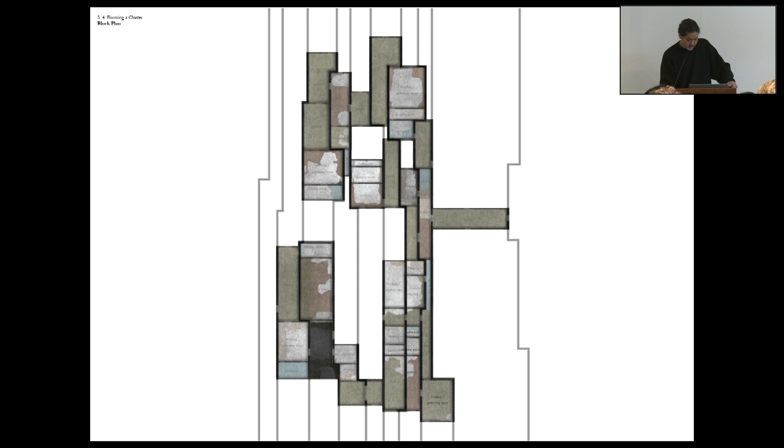Both the circulation and squares occasionally run through individual garden spaces or workshops to allow interactions between the inhabitants in their everyday life. The passive heating walls woven between the active heating walls form a variety of fragmented spaces across the cluster. Variations of homes are composed through combining these fragments of spaces, allowing inhabitants with different trades and lifestyles to come together.

In some homes, rooms would be connected through a passage, demonstrating the experience of compression and expansion of space from getting to the bedroom from the living room. In other cases, the home would bridge across the public outdoor space, having the inhabitant reach their bathroom by once getting out from their individual territory. Each threshold between homes would be reshaped depending on the composition, sometimes forming shared gardens or communal workshops where inhabitants exchange knowledge and skills.

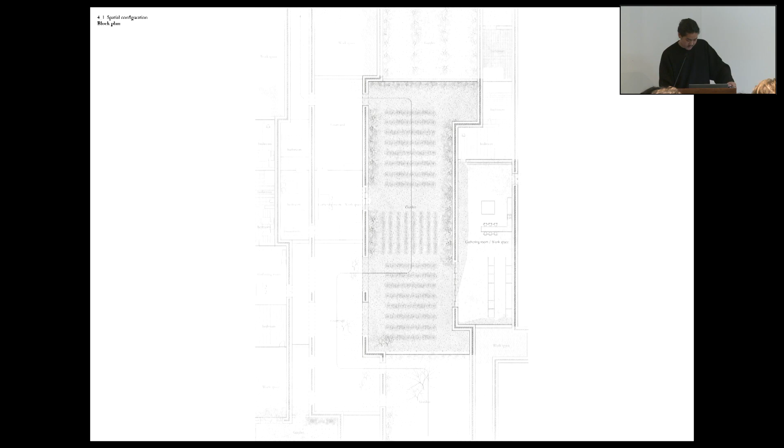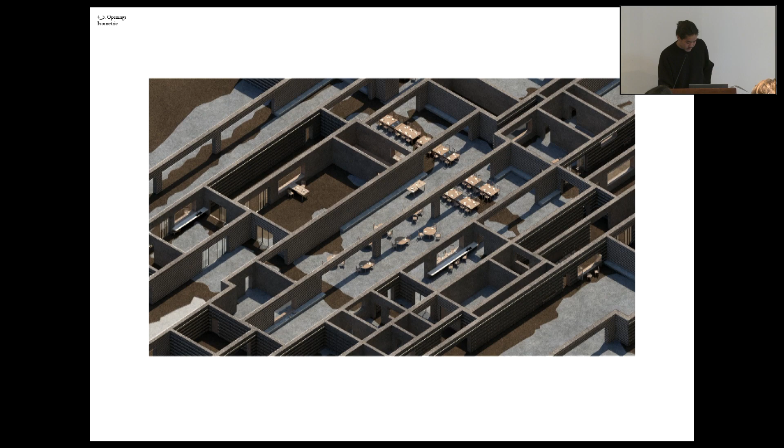The boundary between the working space and their home is blurred by inviting the outdoor ground condition inside, reconceptualizing the idea of clean and dirty. 3 typologies for the openings would create a living environment with a continuous engagement with the outdoor through visual and physical connectivity. The openings would allow an interaction between rooms and gardens, or form a larger space for communal activities, both indoor and outdoor. The gardens would always become present in the inhabitants' everyday life. The sound and the smell of the working activity would leak out from the home.

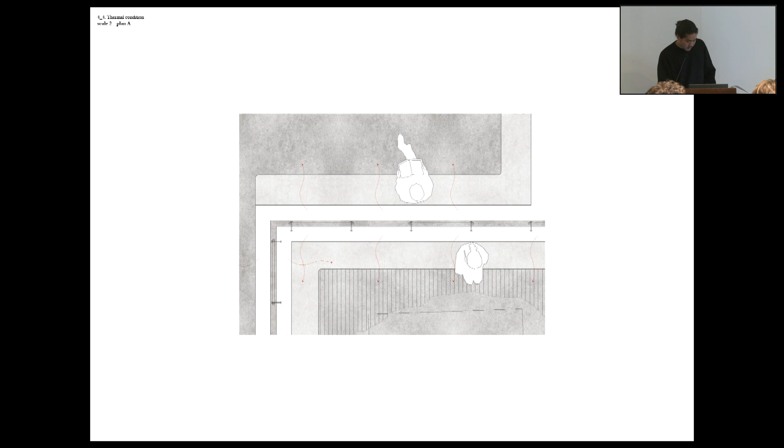Through the hybridization of active and passive heating, the walls become a congregational place rather than a threshold. The warmth of the active heating wall would congregate activities from both indoor and outdoor. The passive heating walls would also function as a wall where the excessive heat from one's domestic activity could become exchangeable, sometimes feeding warmth for the plants or their neighbors. In large indoor spaces, the interior configuration shifts depending on the outdoor temperature, where in winter indoor activities might rely on the periphery of the room more than the summer.

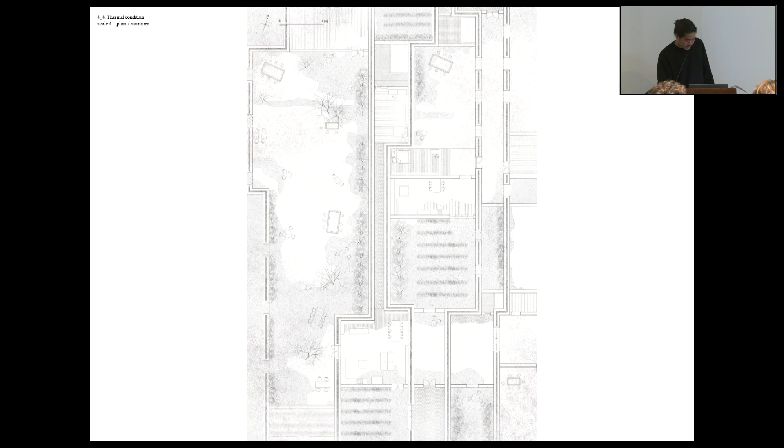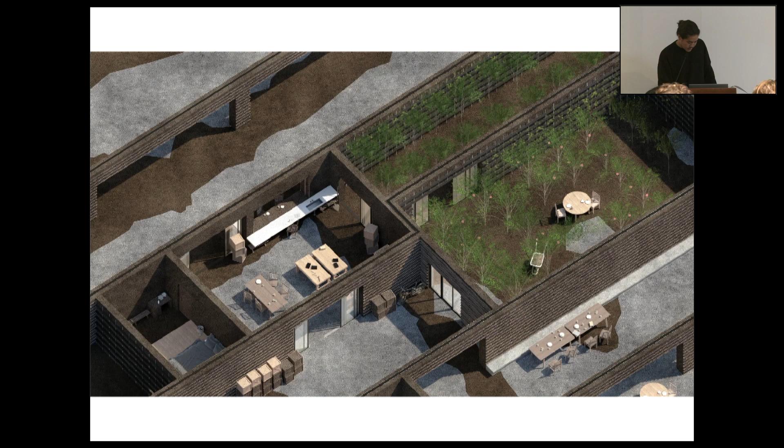Domestic activities will spill out from the home in warmer seasons, forming a congregational moment with the neighbors under the sun. The home is no more an enclosed box with a steady state condition throughout the year, but becomes open to the seasonal and climatic shift, encouraging the domestic activities to become responsive to the outdoor environment. One would share his afternoon with a neighbor at his window sill, over a cup of tea and an orange picked in the morning. Homes share garden spaces with their neighbors, sometimes enjoying their lunch under one's peach tree in summer. Blocks share communal workshops where tools, skills, and knowledge would be exchanged between different inhabitants.

It would share a seasonal feast to celebrate their harvest in the spring, and an indoor communal space for gatherings in the winter. Different clusters would share the communal field, a moment to interact with inhabitants living far across the site through harvesting. The horticultural community would share one single infrastructure, a landscape of thermal walls running across the entire site. One might be sharing a wall with someone living 900 meters away.

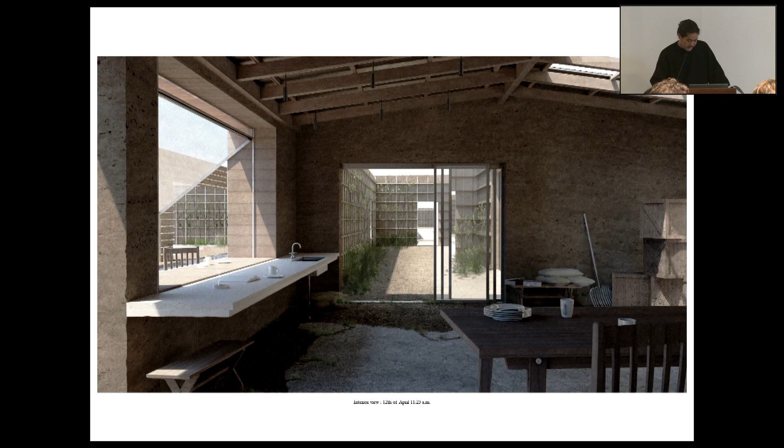The single gesture of configuring thermal walls would loosely connect the entire site, restoring the sense of collectiveness through horticultural production. The variation of homes and hierarchy of sharing allows people with different trades and lifestyles to come together, and the domestic activities to respond to the seasonal shift. The landscape of fruit production in 99 homes would propose an alternative way of collective living, where the conventional notion of work and home, individual and shared, warm and cold, and intimate and distant, is reconceptualized across the wall.